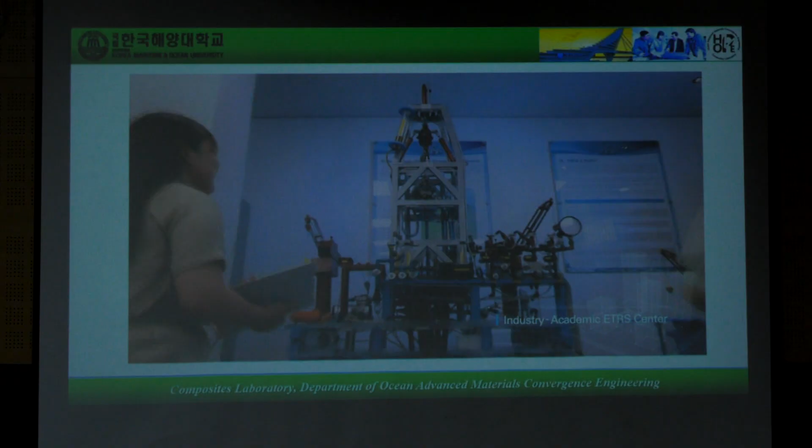The Industry-Academic ETRS Center, where various new technologies and advanced teaching methods are employed, and other town facilities are used to conduct maritime education and research. Moreover, students can freely take part in discussions and learning in a cafe-type learning area.

Thanks to the effort and training of maritime personnel, the Korea Maritime and Ocean University leads maritime education, research, policy, and culture in the Republic of Korea, developing into a maritime specialized, comprehensive university recognized the world over.

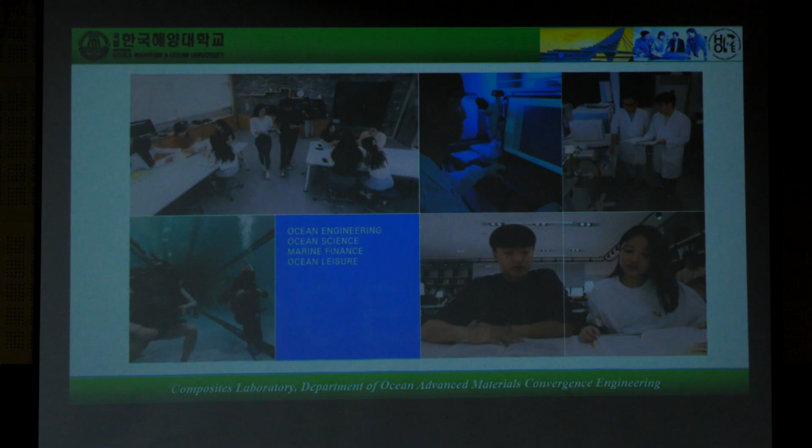Beyond the sea, the Korea Maritime and Ocean University encompasses a bigger world. The school manages specialized education and research for all fields, including the traditional maritime fields of ocean transport, shipbuilding, ports, and distribution, but also the fields of ocean engineering, ocean science, marine finance, and ocean leisure.

Further, in step with the fourth industrial revolution, the school is leading the future maritime industry with autonomous navigation, smart ships, and maritime future cities. This is a comprehensive university with global maritime specialization of the highest international standards. This is the Korea Maritime and Ocean University.

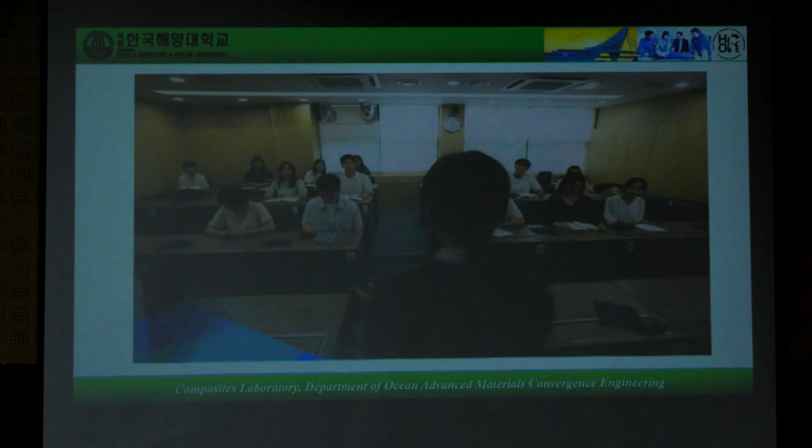Maritime personnel are cultivated at 3 colleges: the College of Maritime Sciences, the College of Ocean Science and Engineering, and the College of Humanities and Social Sciences, and at 5 graduate schools: the Graduate School of General Studies, the Ocean Science and Technology School, the Graduate School of Maritime Industries, the Graduate School of Maritime Finance, and the Graduate School of Global Logistics.

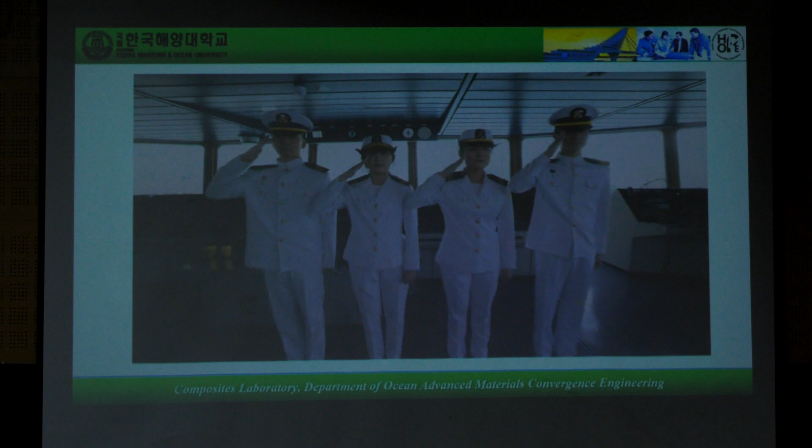A vast sea. We are not afraid to venture out beyond Korea into the world. The Korea Maritime and Ocean University will be the compass and our dependable companion on the voyage of our life.

Our university was established firstly as a national university in Korea. Actually, it was established in 1945.

From now, I'd like to introduce our composite lab. Here, me, and I have 2 postdocs from India. Right now, Sanjay Kumar, he is very smart and has really good ability to publish many papers. And I also have doctoral candidates from China, Kenya, Pakistan, and Korea.

I am also collaborating with several institutes in Korea. They are all my ex-students. So let's enjoy.

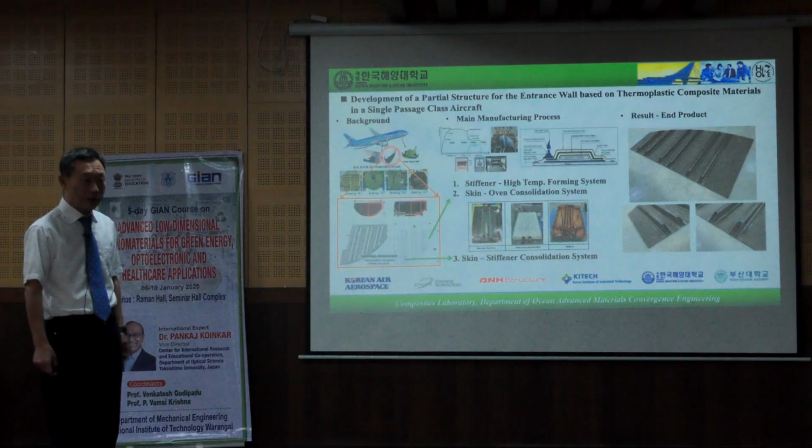As you know, our composite material is widely used in aircraft, automotive, and the ocean industry including shipbuilding. So it's very important nowadays, especially in aircraft, where composite material is used more than 50%.

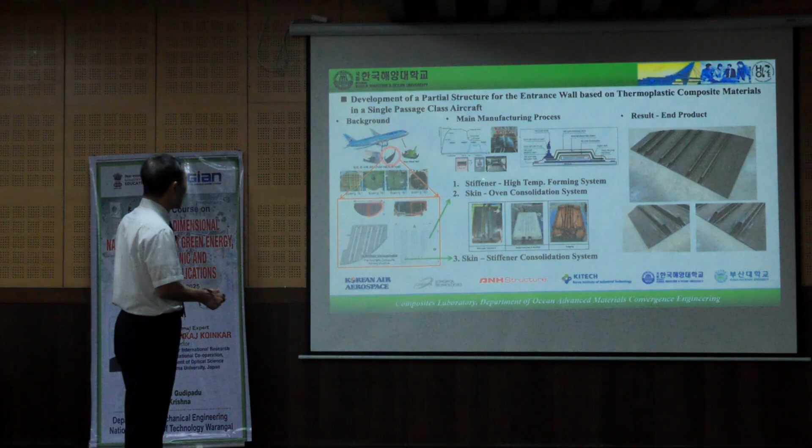So our final target will be like this. Every day we evaluate and apply a stiffener and skin by using the oven consolidation system, like this, and the skin-stiffener consolidation system.

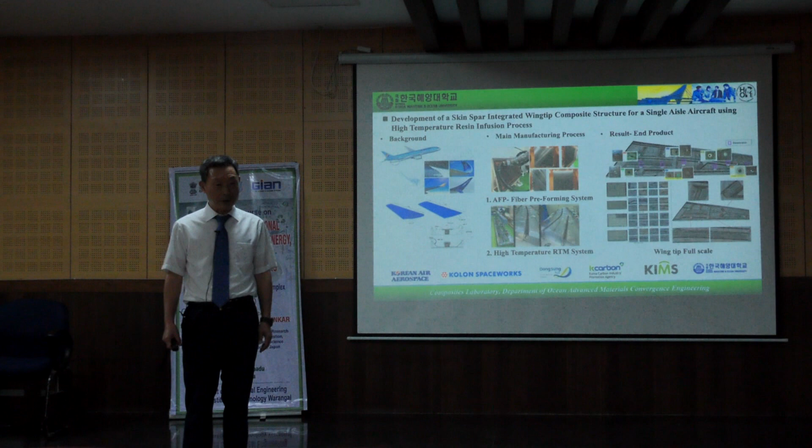And the second one, the development of a skin-spar integrated wingtip. This project was done over 5 years, so all those results are from 5 years of research. Here's our background, and the manufacturing process is like this. We are using AFP and the high-temperature RTM process, resin transfer molding system. Our final end product will be like this, the wingtip, full scale.

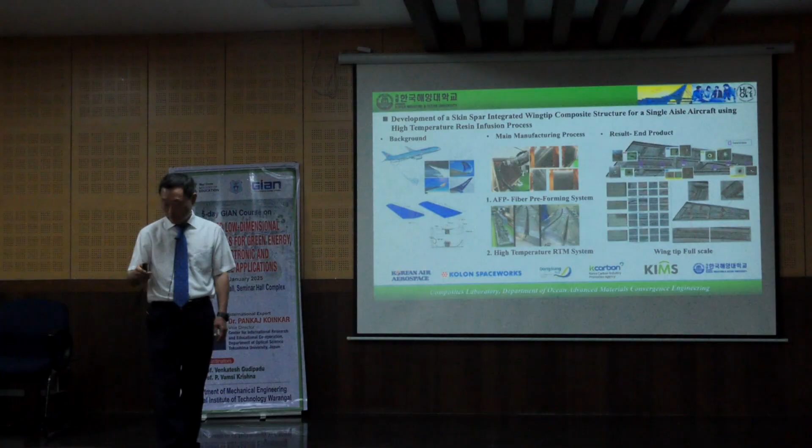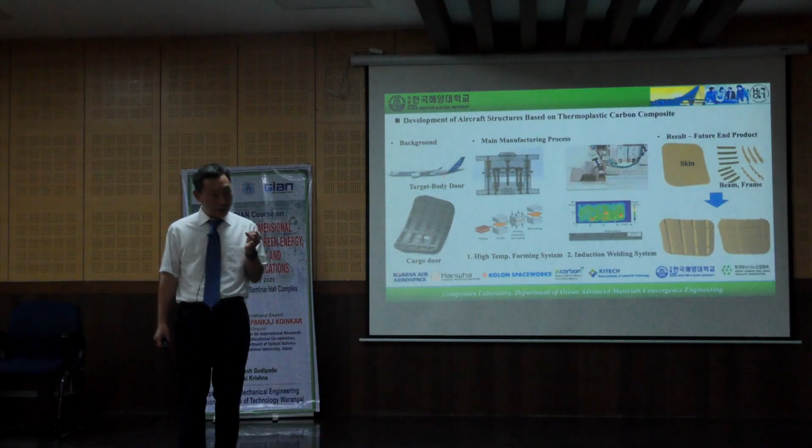Another one is aircraft structure based on thermoplastic carbon composite. As you can see, my project is closely related to mechanical engineering, material science, and nanomaterials. You can see all those fields.

Our background is like this. We are now trying to develop this kind of cargo door, and our end product will be like this. The procedure will be like this.

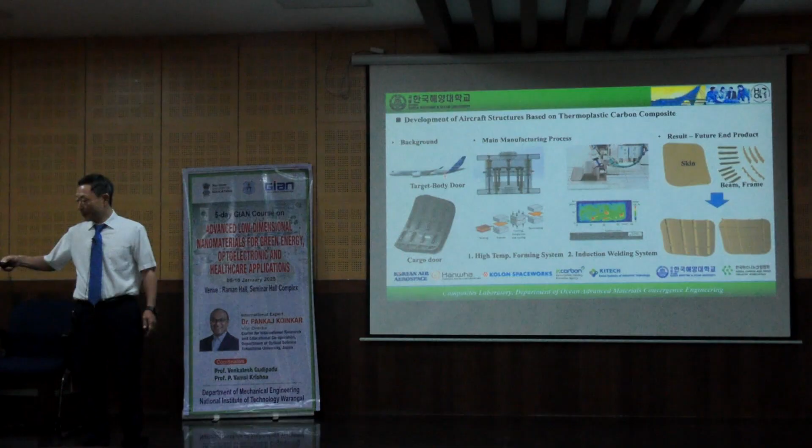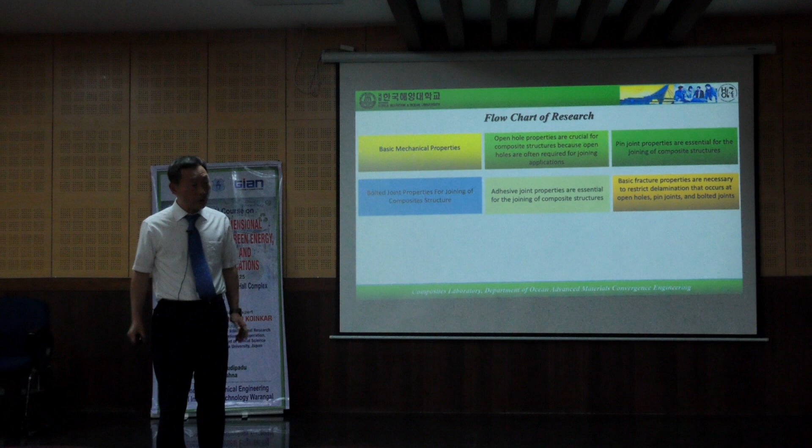And adhesive joint properties are essential for the joining of a composite structure. As you may know, composite material has a very serious problem due to delamination. So here, basic fracture properties are necessary to restrict the delamination that occurs at open hole joints, pin joints, and bolted joints.

Also, we have to apply this kind of composite structure to industry, like aerospace, automotive, and shipping. So industrial purpose composite structure is very important to develop.

So I'd like to present the first topic: combined effect of temperature and pre-bending on the flexural properties of carbon fiber polyetherketoneketone composites. So from now, let's enjoy. Okay, so that is here.

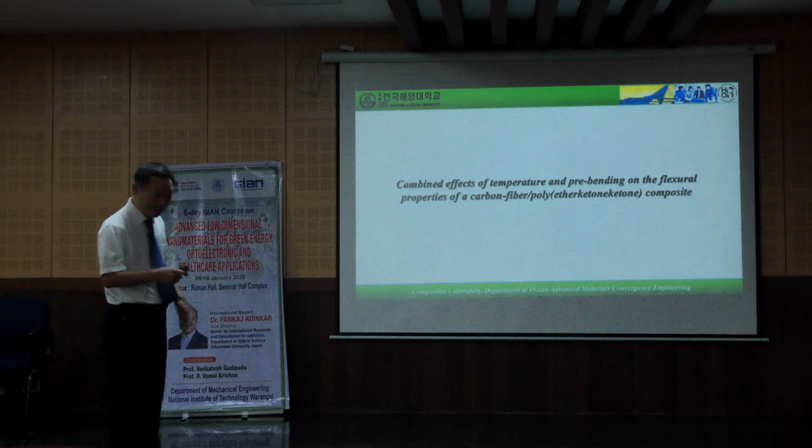As you can see, fiber reinforced thermoplastic polymer (FRTP) is widely used in aircraft, and also UAM structures, and automotive. We are now targeting to apply it in this structure. So the classification of plastics is like this.

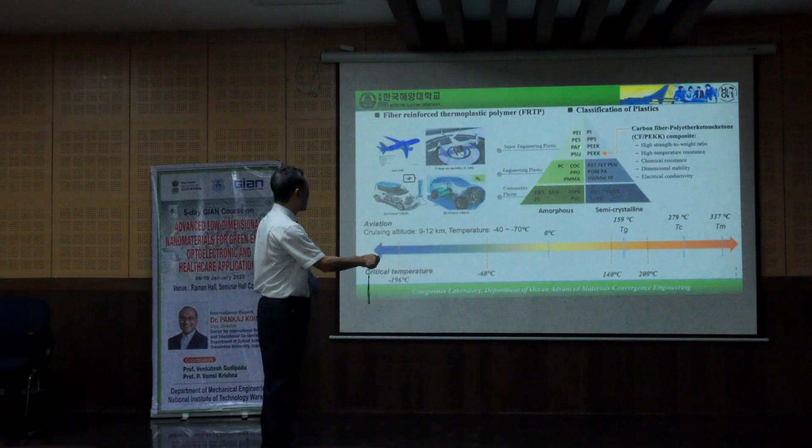Amorphous structure as a super engineering plastic, and engineering plastics is like this. And also, as a semi-crystalline here, I'm now using this kind of PEKK, CF/PEKK. So just to remind this.

In aviation, the cruising altitude will be 9 to 12 kilometers, right? And the temperature is minus 40 to minus 70. So our temperature range will be minus 196 Celsius as a crucial, critical temperature, and also minus 60.

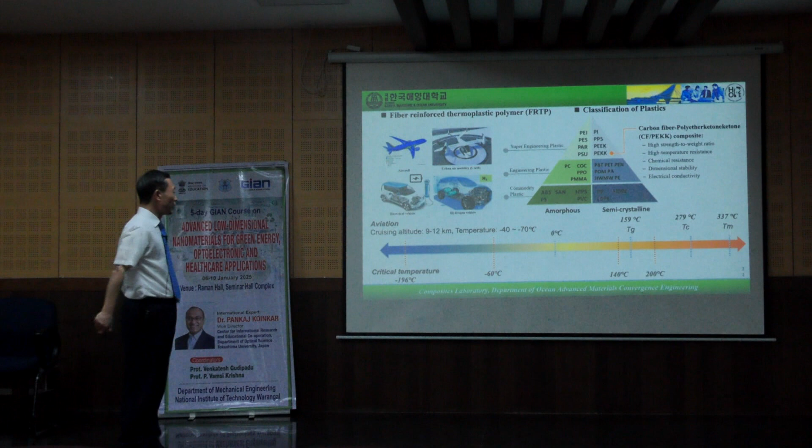Our CF/PEKK has a glass transition temperature of 159. 159. So we decided on temperatures of 140 and 200. This is our temperature range for the experiment.

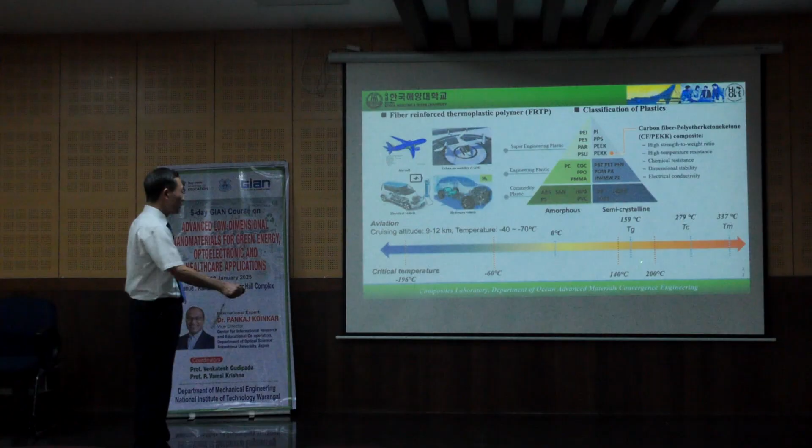We prepare the specimens like this. The CF/PEKK composites are fabricated with 12 layers of prepreg and consolidated under vacuum, achieving a thickness of 1.7 millimeters and an exceptionally low void content.

We have to lay up the procedure like this. We stack the prepreg, 12 stacked layers of CF/PEKK, and by using the vacuum bag and the oven consolidation, after that we prepare the final composite plate.

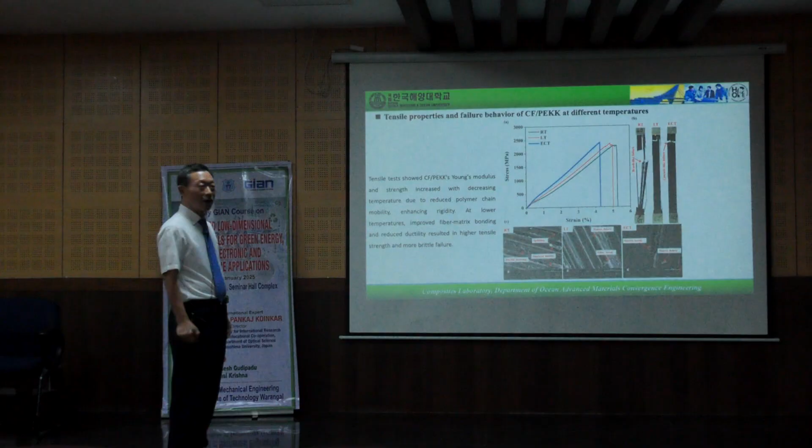This slide means tensile tests show the CF/PEKK's Young's modulus and strength increased with decreasing temperature, due to reduced polymer chain mobility enhancing rigidity. At lower temperatures, improved fiber-matrix bonding and reduced ductility resulted in higher tensile strength and more brittle fracture.

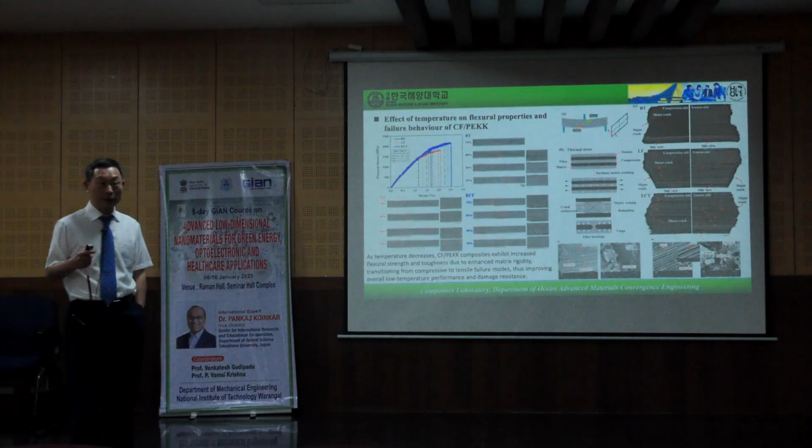This kind of result was published in Composites Part A. The impact factor is more than 7, a very good journal.

This slide shows the flexural stress and strain relationship, and as you can see, as the temperature decreases, at extreme cryogenic temperature, CF/PEKK composite exhibits increased flexural strength and increased toughness due to enhanced matrix rigidity.

Transitioning from compressive to tensile failure mode, thus improving overall low temperature performance and damage resistance.

Just look at this mechanism. Thermal stress will occur like this: in the case of fiber, under compression, and matrix under tension. This kind of residual stress will occur here, and the fracture mode will be changed.

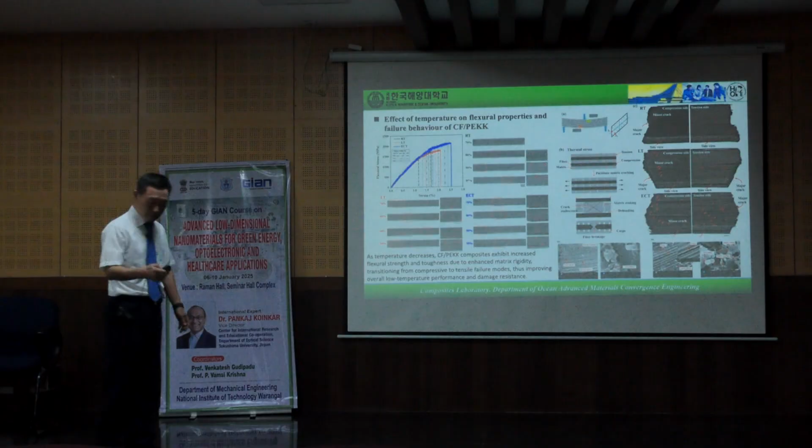Also, the effect of temperature on flexural behavior of pre-bent CF/PEKK. You can compare in case of 30% pre-strain. The fracture morphology is like this. Just look at the procedure.

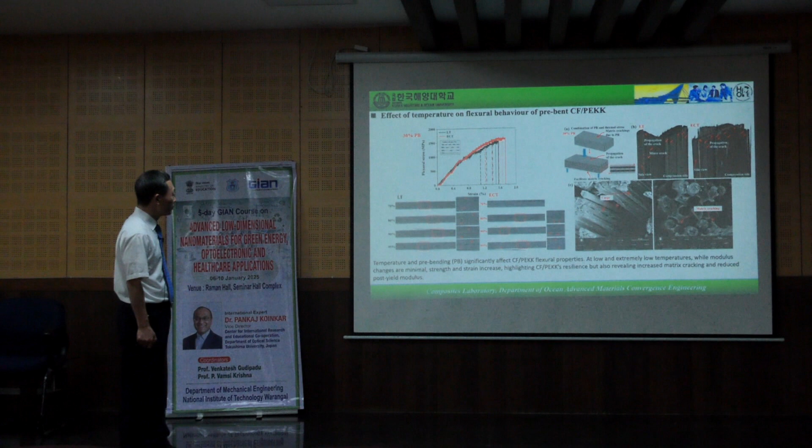Can you follow me? Yeah. Let's go slowly.

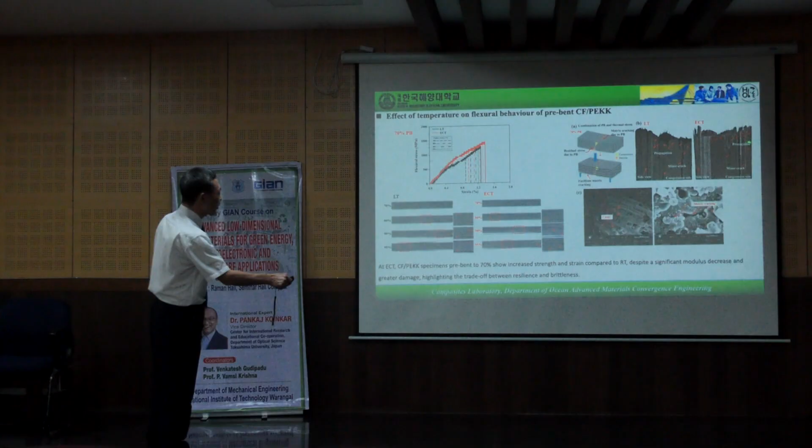And this slide shows the effect of temperature on the flexural behavior of pre-bent CF/PEKK. In case of 70%, big difference. Low temperature, extreme cryogenic temperature: micro-cracks will occur like this. So you can compare between 30% and 70%.

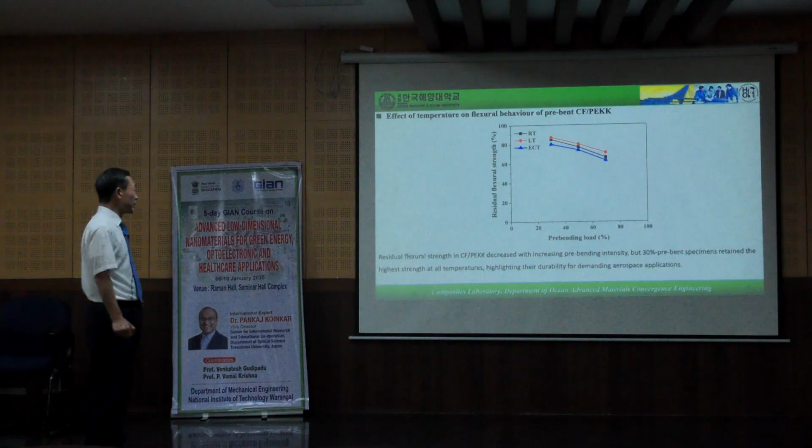This slide shows the residual flexural strength at room temperature, extreme cryogenic temperature, and low temperature. Residual flexural strength in CF/PEKK decreased with increasing pre-bending intensity, but 30% pre-bent specimens retain the highest strength at all temperatures. Here, 30%. Highlighting their durability for demanding aerospace applications.

This is a very important result. So under 30% pre-bending, we can use it. This is a very important result. So our consortium is using this data.

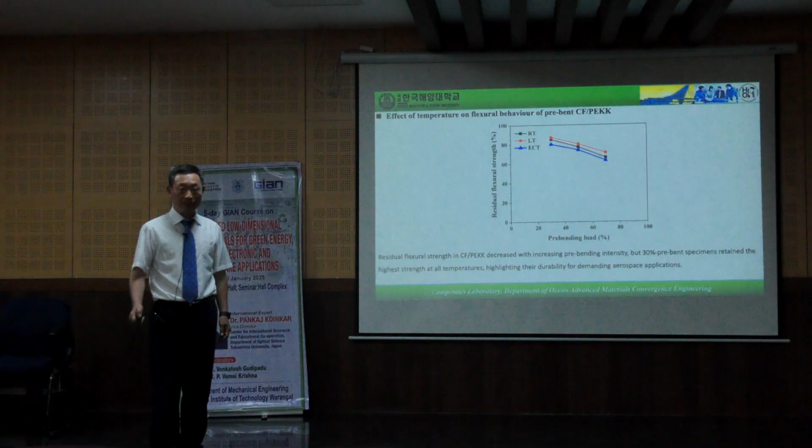I'd like to move to the second issue: tensile behavior of open hole, pinned joint and bolted joint of CF/PEKK composite under extreme temperature. Mechanical joints offer several advantages, like easy installation, repair, resistance to environmental factors, and higher safety factor, a reliable and preferred joining method in modern composite structures.

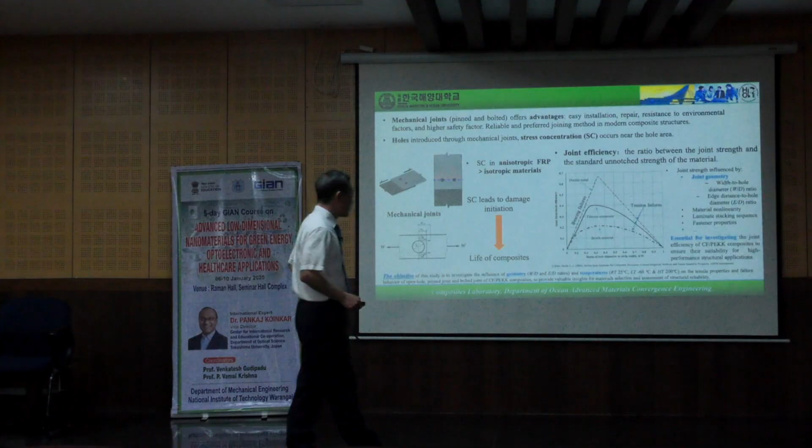But when we create a hole, stress concentration will occur like this. It will reduce the life of the composite. So you can see this kind of shade. So at this point, it is very important to check the joint efficiency. The joint efficiency here. Joint strength is influenced by joint geometry.

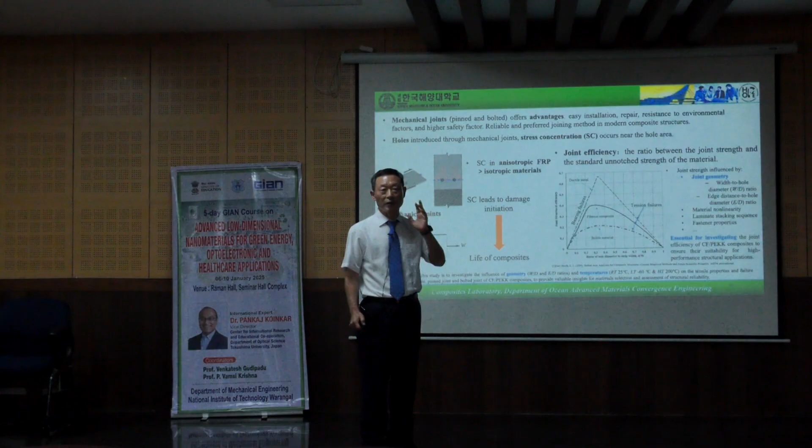Width to hole diameter, the W/D ratio, is very important here as a parameter. And edge distance to hole diameter, the E/D ratio, is very important. So in this paper, the very important factors are W/D and E/D ratio. So systematic research will be performed.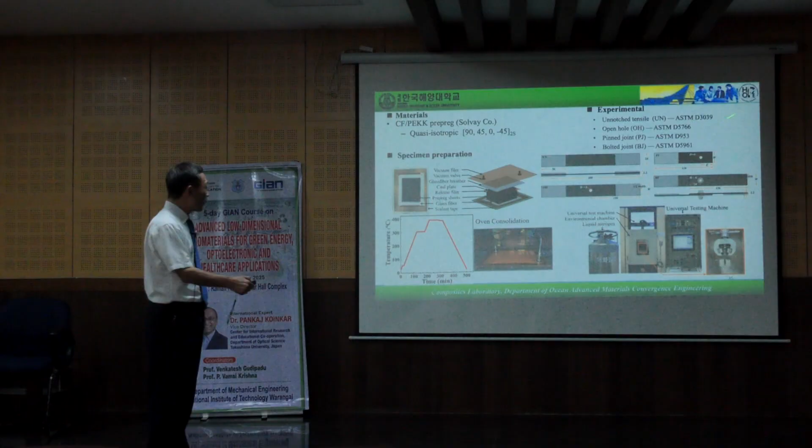We prepared 4 kinds of specimens like this: unnotched specimen, open hole, pinned joint, and bolted joint. Here we are coping with some limitations, because this is a very, very expensive material. 1 roll, the price will be $10,000. Very expensive material. So it is not easy to handle this material. We have to be careful to handle and prepare this kind of specimen.

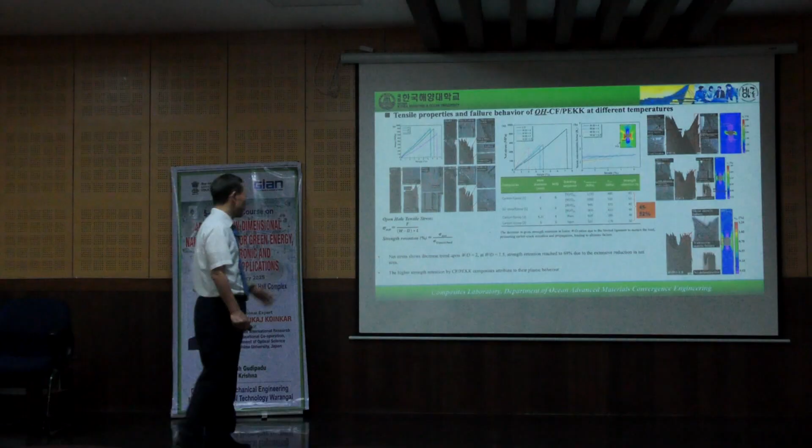First result, tensile properties and failure behavior of open hole CF/PEKK at different temperatures. Please look at this data. This is from the reference values: composites, carbon epoxy, glass epoxy, and carbon epoxy. Just look at the strength retention value, around 45 to 52%. But in our CF/PEKK composite the strength retention reached 69%. This means this is a very good, high quality material. So we are using this material.

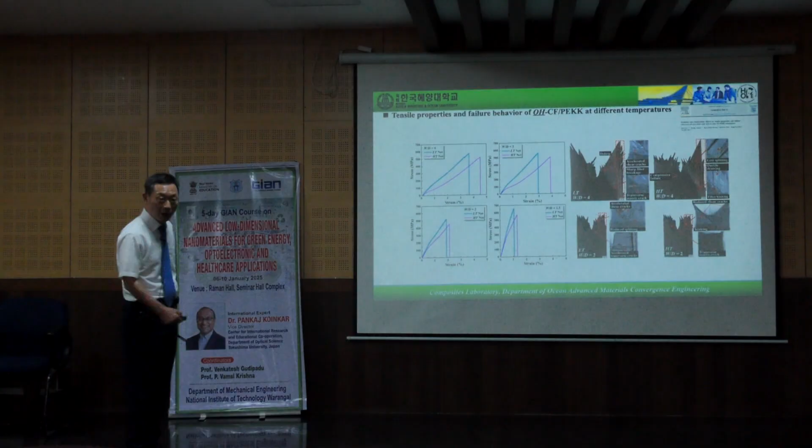This slide shows the tensile properties and the failure behavior at different temperatures. We also published this in the Composites Part A journal. We changed the W/D ratio from 1.5 to 4. So just compare those behaviors. In case of 1.5, the behavior is like this, small strain, and 2, 3, 4, at low temperature and high temperature. The fracture morphology will change like this.

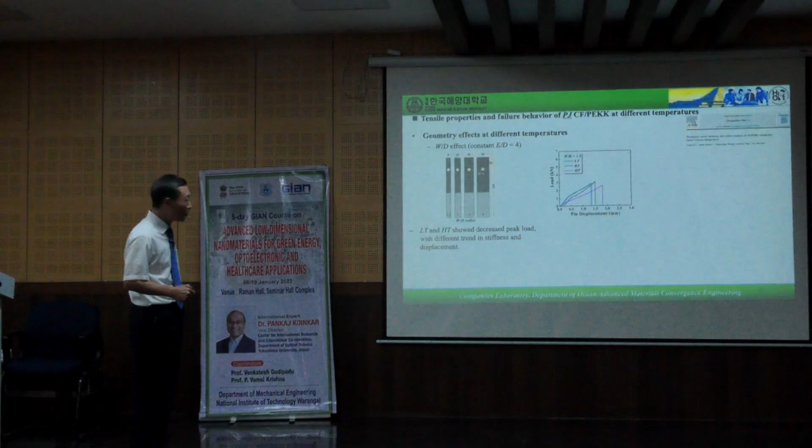The failure behavior of pinned joint at different temperatures, W/D effect under constant E/D ratio equal 4. Just compare the result. We prepared this kind of specimen. The result is like this. In case of W/D equal 1.5, low temperature, room temperature, high temperature.

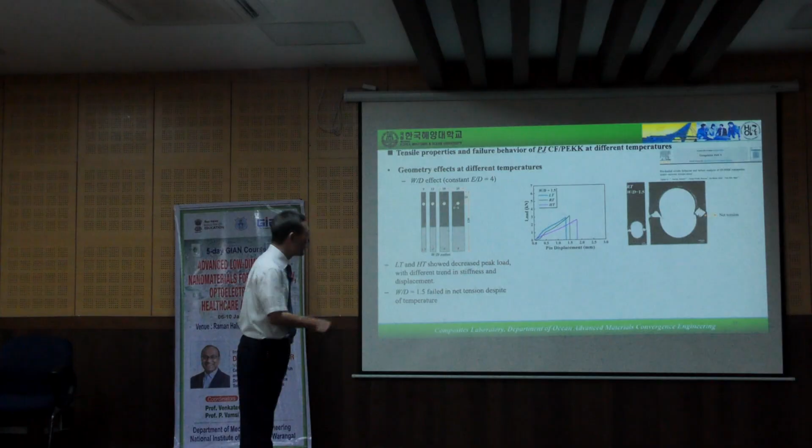Low temperature and high temperature showed decreased peak load with different trend in stiffness and displacement, right? Just look at the fracture behavior. In case of 1.5, totally occurred net tension hold.

In case of 2, can you see the bearing failure mode? Not the net tension. Called bearing failure. This is the result, 3 and 4. Whole bearing failure. Bearing. W/D 3 and 4.

So, finally, we summarize like this. W/D effect under constant E/D ratio equal 4. Marginal load increased due to the same bearing failure. Increased specimen width prevented net tension failure mode. Bearing failure achieved beyond W/D ratio 1.5. Very important result.

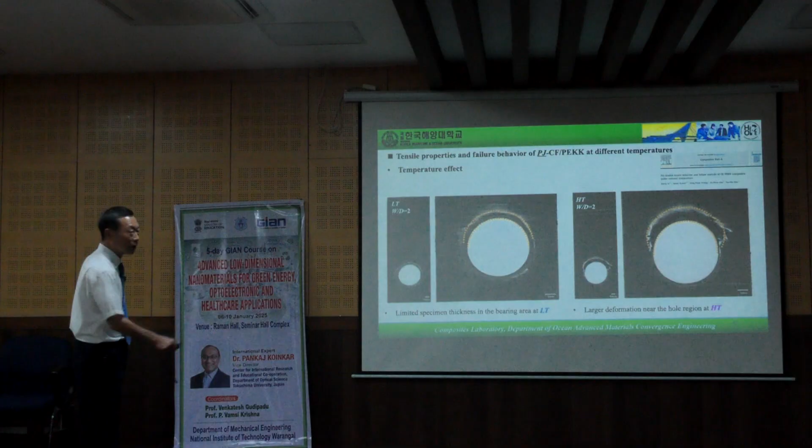Just compare low temperature, high temperature, same W/D ratio. The fracture will be occurred like this as a bearing mode. And pin joint CF/PEKK at different temperature, the fracture behavior, geometry effect at different temperature, E/D ratio effect. Just before we compared the W/D ratio. This is E/D ratio under W/D ratio, the constant ratio.

Just we'd like to compare the bearing strength. The relation between bearing strength and the W/D ratio shows right there. Bearing strength primarily influenced by W/D ratio, right? And E/D ratio had minimal impact. Also, bearing strength at the low temperature and the high temperature slightly lower than room temperature. W/D ratio and E/D ratio equal to 4 shows the highest bearing strength. Right. This is also a very important result as a bearing strength.

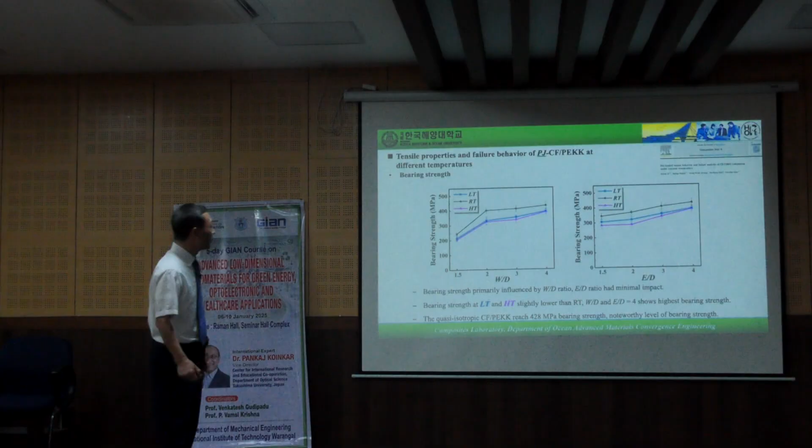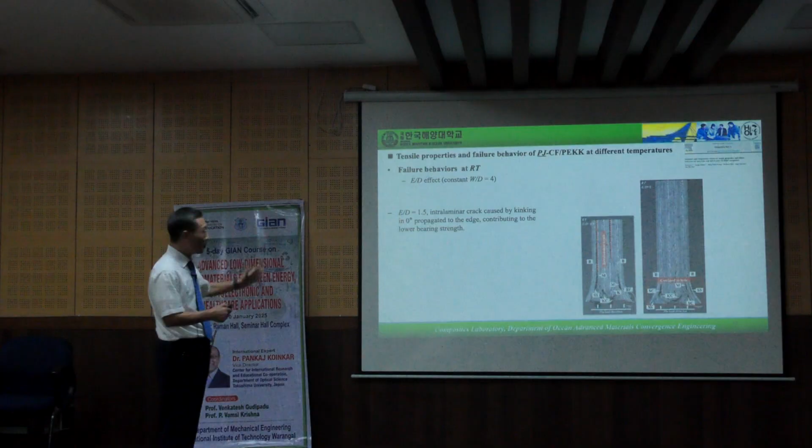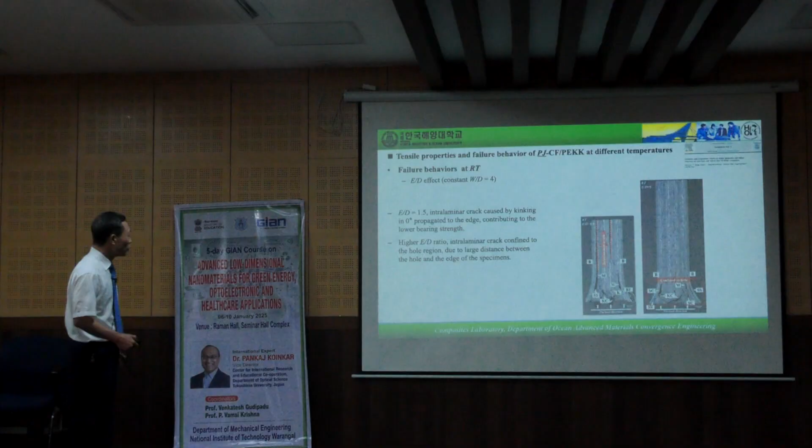So, just before we compared the W/D ratio; from now, E/D ratio under constant W/D ratio. E/D ratio equal 1.5. Intralaminar crack caused by kinking in 0-degree propagated to the edge, contributing to the lower bearing strength. And the higher E/D ratio than 1.5, intralaminar crack confined to the hole region, due to large distance between the hole and the edge of the specimen.

At the low temperature, we can observe the buckling and kinking and kink collapse, bending failure, and the shear-shaped crack, shear-driven compression. So temperature changes, the thermal deformation occur along the fiber directions. Intralaminar crack and interlaminar crack also will occur. At the low temperature, fiber under compression, matrix under tension. So the reduced thickness of specimen due to the temperature-induced acceleration of a localized compressive failure.

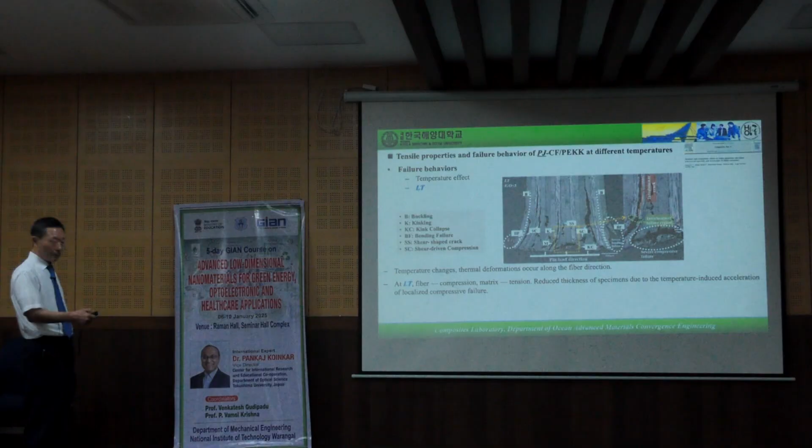At high temperature, we can observe the crack pattern like this. At high temperature, increase the ductility, right? So increased ductility of PEKK resulted in significantly large plastic deformation and external pile-up you can observe. In this case, fiber under tension, matrix under compression, right? So the severe bending failure in 90 degree due to the accelerated compressive failure of matrix.

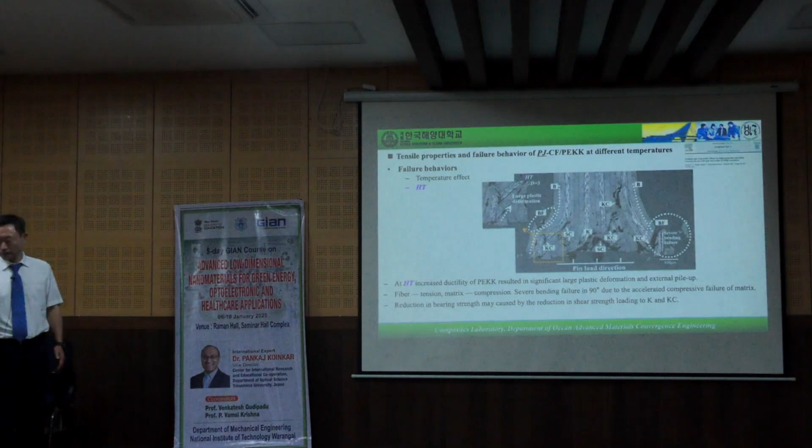We check the situation by using the DIC. In case of 1.5, geometry effect, load displacement. DIC images at the 99% failure displacement reveal minor bearing before fracture with predominant tension failure. We check the situation. In case of 1.5,

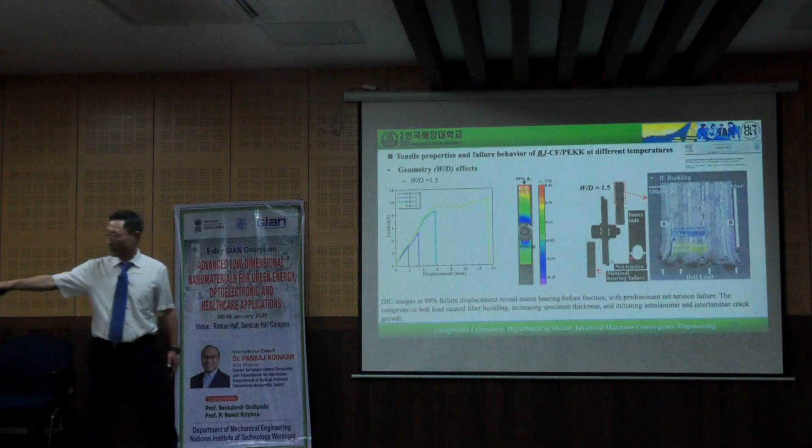in case of 2, just compare the fracture pattern. Increasing W/D to 2 yields 66% higher peak load and displacement. DIC images show increased bearing, shifting from net tension to combined net tension and bearing mode, with minor bending near the bolt contact area.

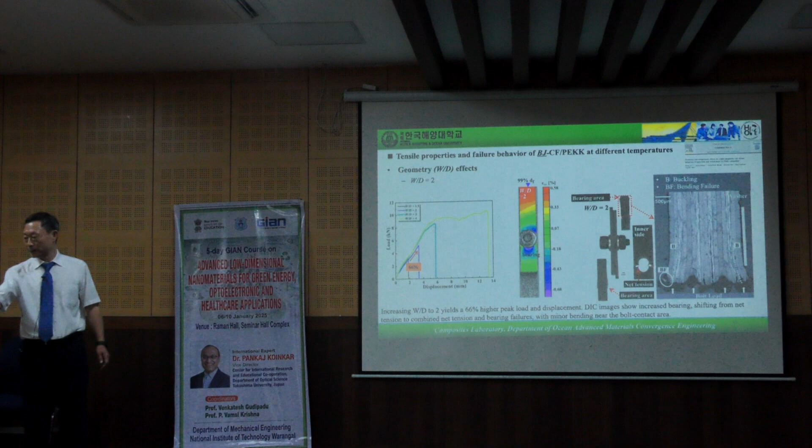This is W/D equals 3. DIC pattern like this. I will skip this, very similar with the previous slide. Just look at the fracture pattern, bearing area.

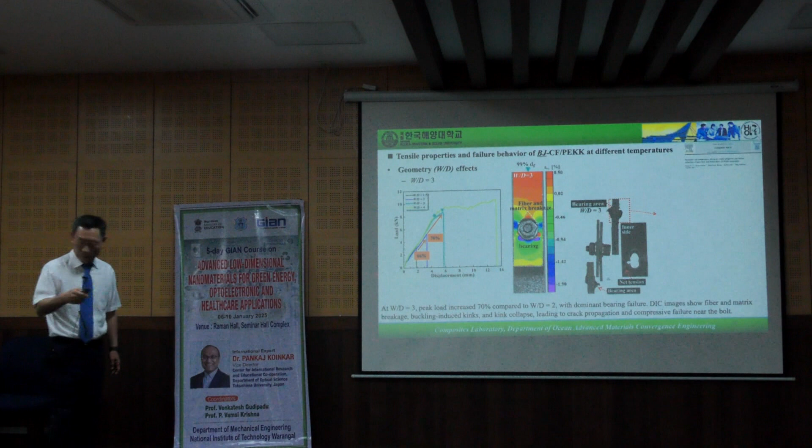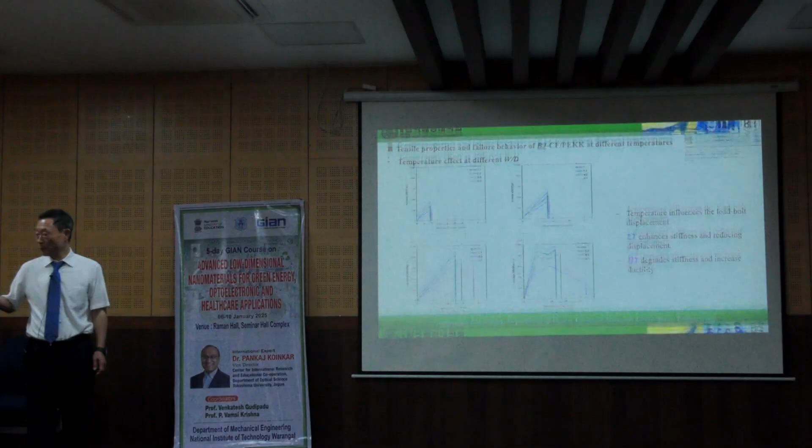Finally, we compare the joint efficiency depending on the W/D ratio. Just look at the results. Because of time limitation, I'd like to move to the next issue. Here, strengthening of a composite through incorporation of a halloysite nanotube. From now, I'd like to move to the nanomaterials effect.

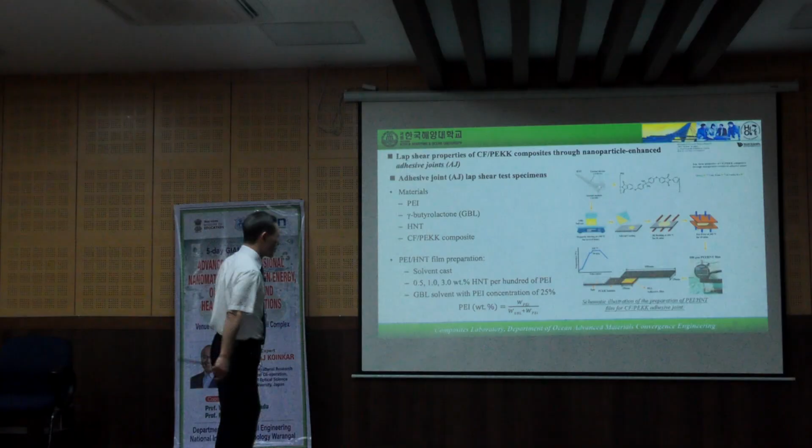This slide shows the lap shear properties of CF/PEKK composite through nanoparticle-enhanced adhesive joint. We prepared the specimen like this. Schematic illustration of the preparation of PEI/HNT, HNT means halloysite nanotube, film for CF/PEKK adhesive joint.

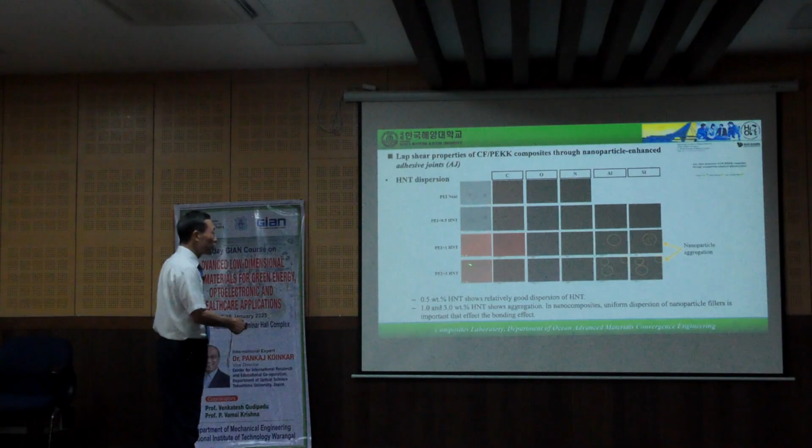We observe the HNT dispersion situation. In case of 1% HNT and 3% HNT, we can observe nanoparticle aggregation. This is a very big problem in incorporating into the composite material, because this kind of aggregation causes stress concentration. This is a big problem, so we have to solve it.

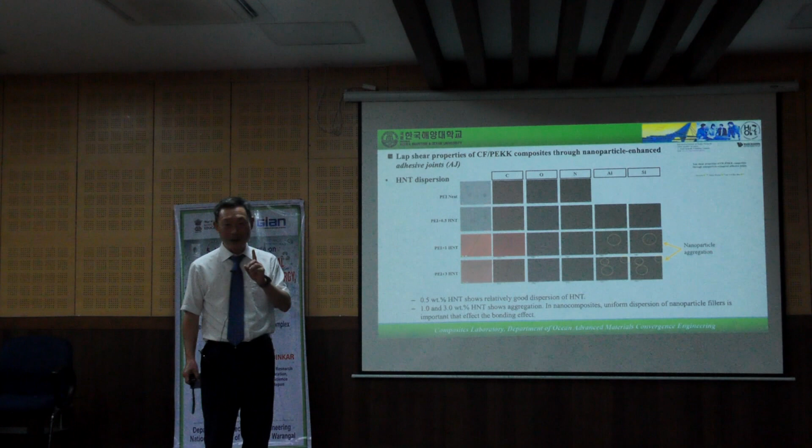So, in case of this aggregation situation, two stages of aggregation will occur. The first stage occurs by van der Waals force, and second, chemical shrinkage. So, two types will occur. So, 0.5, 1.0 and 3%. The situation is like this.

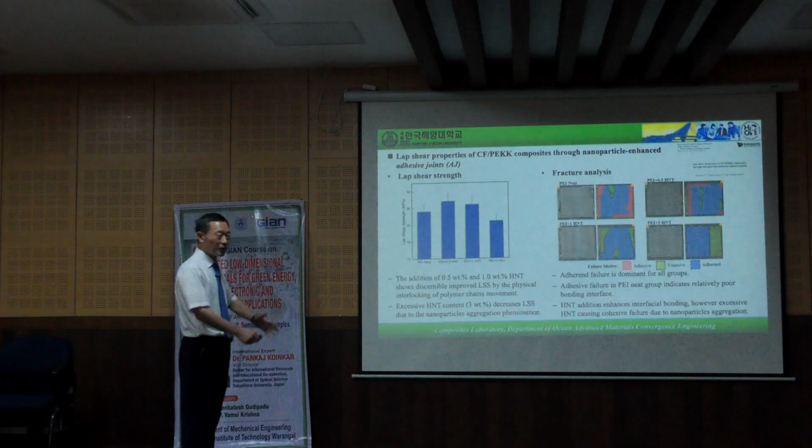Also, we performed the lap shear strength test through nanoparticle-enhanced adhesive joint. The lap shear strength for 0.5 HNT shows the highest value. This is the main result here. Over 0.5, it decreases. So we finally used this 0.5 result.

Also, we observed the fracture pattern, 0.5, 1, 3%. Detection of Si and Al indicates the bonding joint interface is formed by the complex layer of PEKK, PEI, and HNT. The situation is like this.

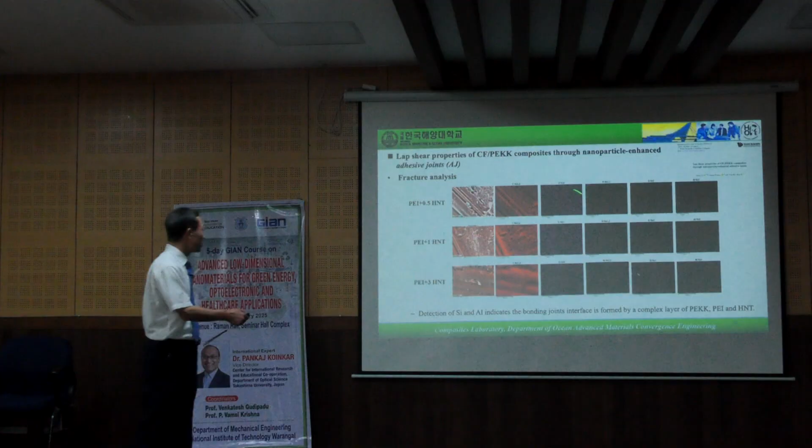Neat PEI, PEI plus 0.5 halloysite nanotube, fracture morphology. We can observe several phenomena here. In case of neat PEI, it shows smooth ductile drawing and exposed fiber and exhibits poor bonding between fiber and resin. 0.5 is the most important. So 0.5 shows rougher ductile drawing with resin residue and cusp morphology, which indicates improved interfacial bonding. In case of 1 and 3, just look at the fracture morphology and compare.

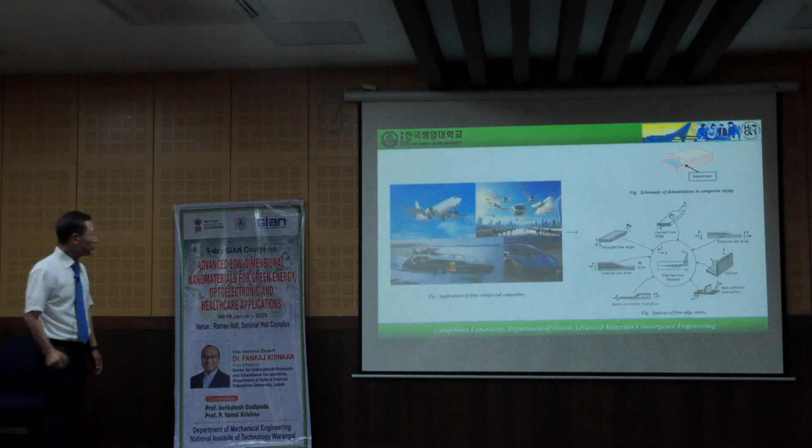So, from now I'd like to move to another issue. Effect of melt-infusion of PET, PEI, and PEEK thermoplastic film interleaves on the fracture toughness and failure behavior of carbon fiber epoxy thermosetting composite. This left-hand side shows the application of fiber reinforced composite. So, automotive and UAM and aircraft.

We prepared the specimen like this. Just before, I mentioned delamination. Delamination is a big problem, so we have to prevent this kind of delamination. We use PET, PEI, PEEK. We prepared the CFRP preform and the stacking procedures, and we use vacuum-assisted resin transfer molding. And finally, we prepared the mode 1 specimen and the mode 2 specimen.

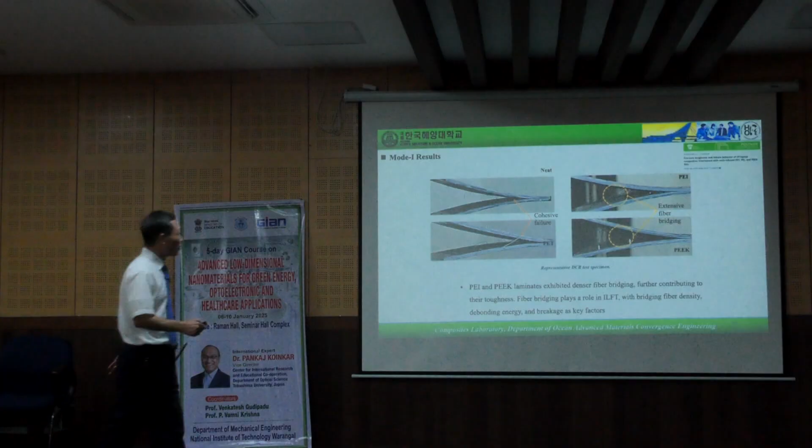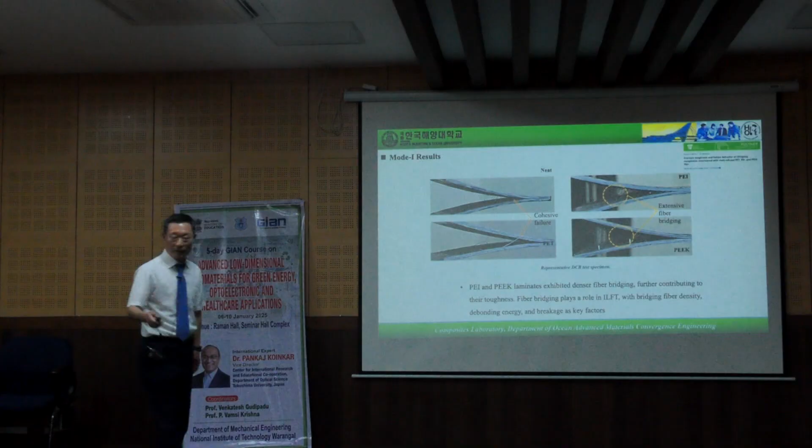This is the result of mode 1. Again, neat, PET, PEI, PEEK. The situation is like this. In case of PEI and PEEK, we can observe fiber bridging, nano bridging occurs like this. But neat and PET, we cannot. We also observe the same image. Neat, PET, PEI, PEEK.

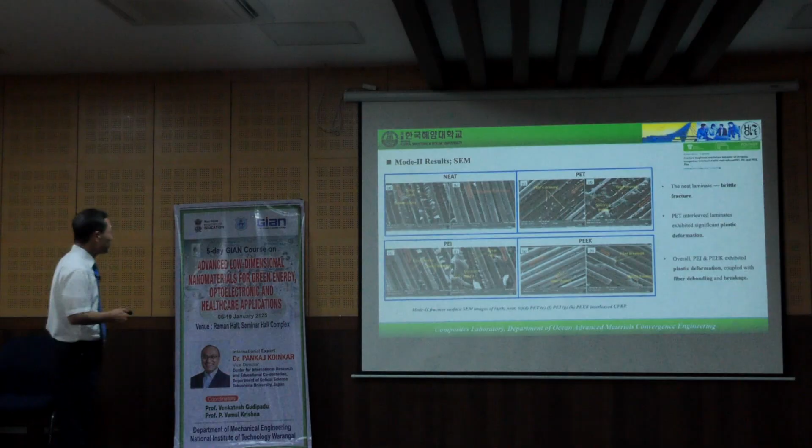Incorporating PET, PEI, and PEEK film significantly improved the mode 1 and mode 2 ILFT, interlaminar fracture toughness. And the failure modes in mode 1 were characterized by cohesive failure and predominant intermittent adhesive failure, leading to a tortuous crack path with extensive plastic deformation in PEI and PEEK interleaved laminates.

In mode 2, the neat and PEI laminates fail cohesively, while in the PEEK laminate, the crack deflected to the weaker TP-epoxy interface due to its weaker bonding with epoxy than PEI, limiting its full toughening potential. This result acknowledges the critical role of matrix compatibility.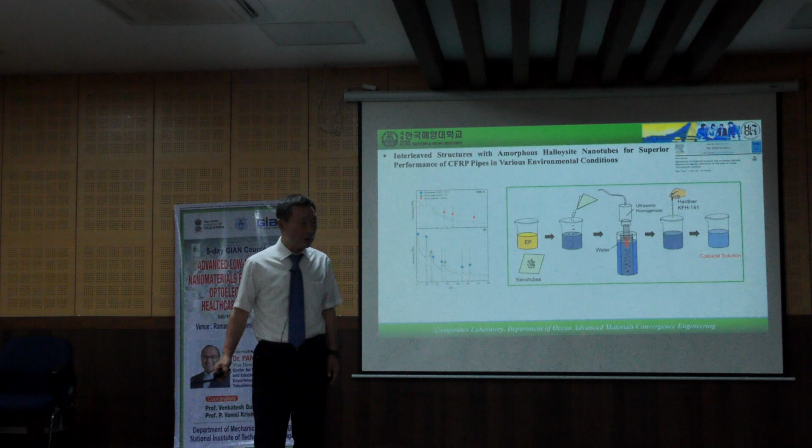So we prepare the specimen, epoxy, nanotube. We prepare the specimen. In case of a pipe composite, we prepare 5 kinds of specimen. E3 means neat epoxy. And E2A1 means 2 layers of neat epoxy and 1 amorphous layer. So we designed 5 kinds of specimen like this.

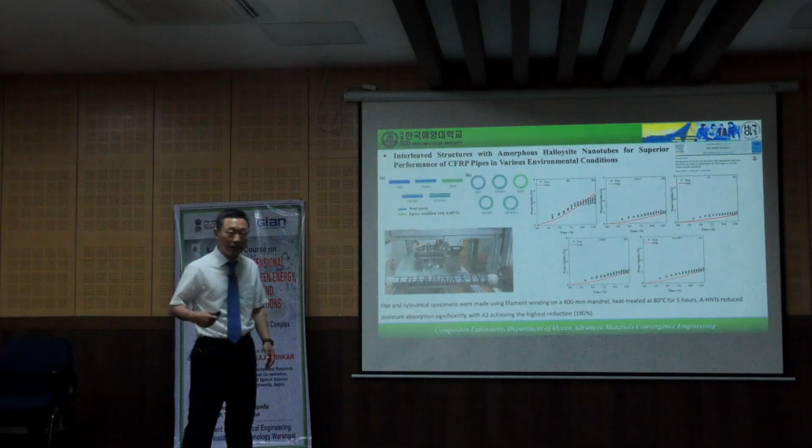The result: flat and cylindrical specimens were made using filament winding on a 400 millimeter mandrel. We call this mandrel. And filament winding. Finally, we can get the 5 composites. Here, heat treated at 80 Celsius for 5 hours. Amorphous halloysite nanotubes reduce moisture absorption significantly, with the amorphous structure achieving the highest reduction, 190.

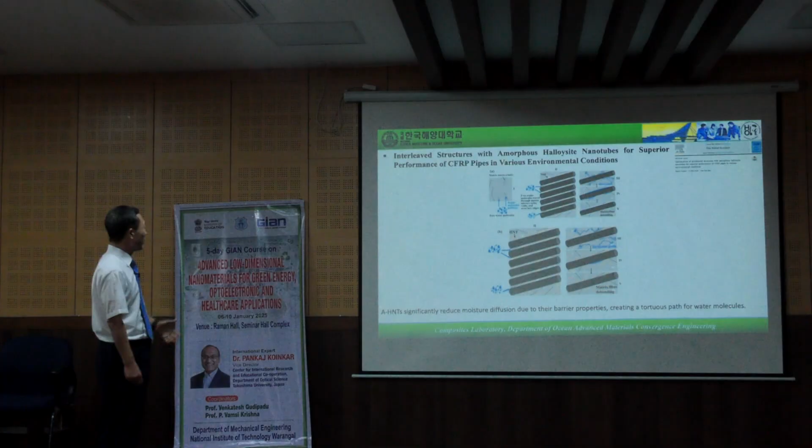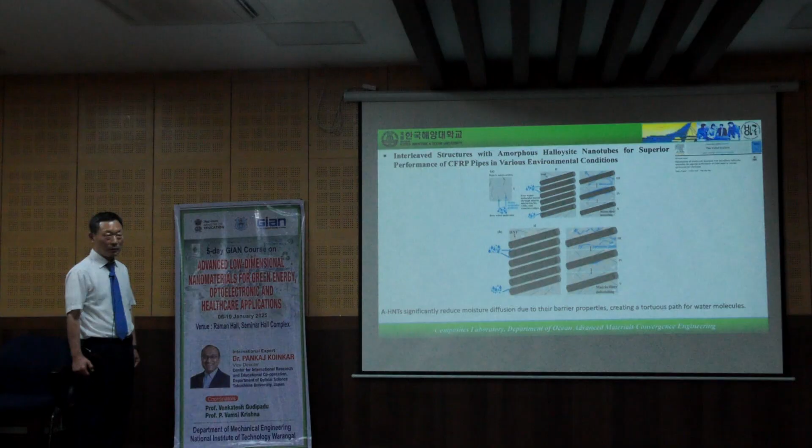Here, interleaved structure with amorphous halloysite nanotubes for superior performance of CFRP pipes in various environmental conditions. This result is also published in Thin-Walled Structures. Amorphous halloysite nanotubes significantly reduce the moisture diffusion. Very important thing: due to their barrier properties, a tortuous barrier will be made, incorporating the halloysite nanotube.

Just to compare those results, flexural stress and strength before moisture absorption, after moisture absorption, and after drying. The situation is like this. We can summarize it like this. Before moisture absorption, AHNT composites showed superior flexural modulus and strength. A3 had the highest strength, meaning the amorphous structure, 3 layers, showed the highest strength. Moisture reduced the flexural properties, but the AHNT composite retained higher performance, showing 30% reduction.

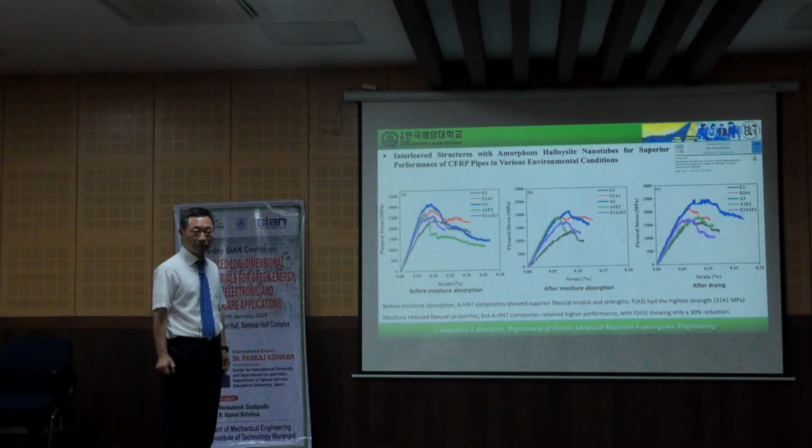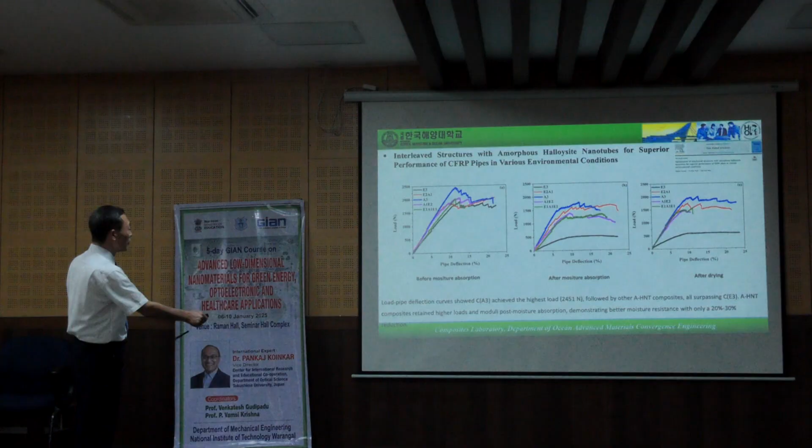Before and after drying, the situation is like this. Morphology change. Also, load and deflection. All those design structures change like this. This slide shows the relationship between stiffness before and after drying. So here, as you can see, the highest value is A3, 0.5 halloysite nanotube, and amorphous halloysite nanotube showed the highest value. We check the situation and the flex pattern.

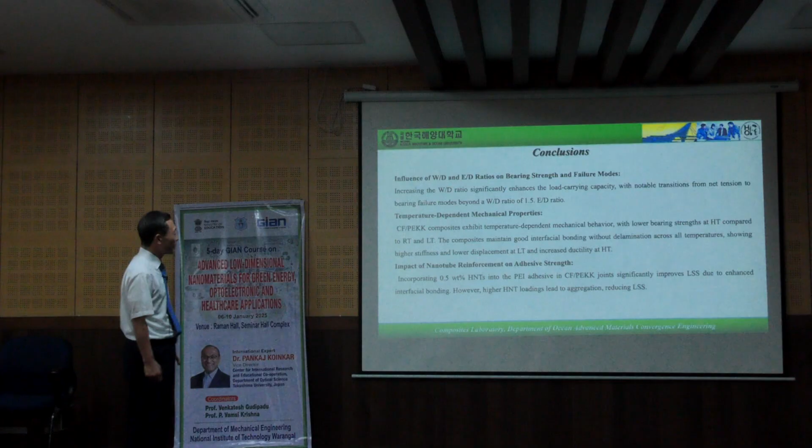Finally, I'd like to conclude all our research results. The first, influence of W/D ratio and E/D ratio on bearing strength and failure mode. Geometry effect. Increasing the W/D ratio significantly enhances the load carrying capacity, with a notable transition from net tension to bearing failure mode beyond the W/D ratio of 1.5 E/D ratio. This is a very important thing regarding geometry effect.

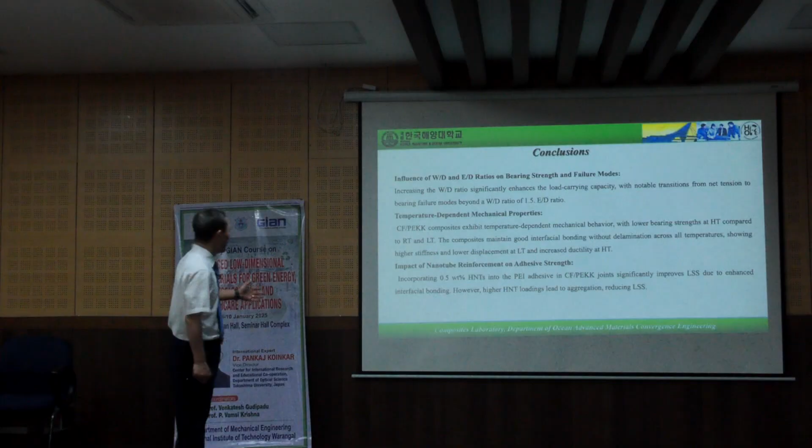And the second, temperature-dependent mechanical properties. CF/PEKK composites exhibit temperature-dependent mechanical behavior with lower bearing strength at high temperature compared to room temperature and low temperature. The composites maintain good interfacial bonding without delamination across all temperatures, showing higher stiffness and lower displacement at low temperature and increased ductility at high temperature. This is the second result.

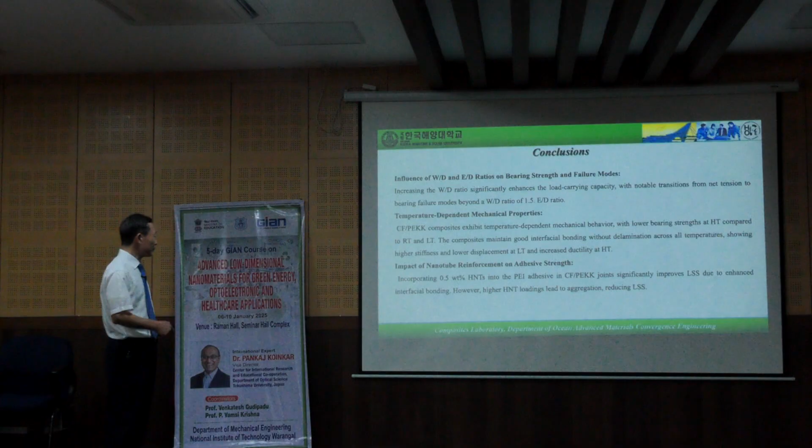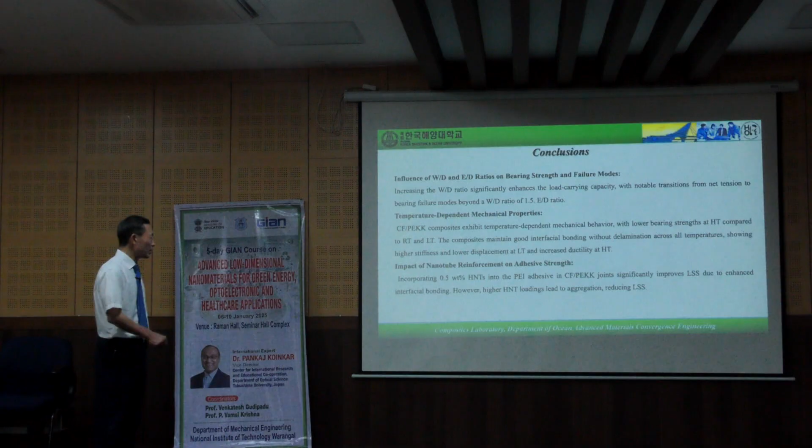And the third, impact of nanotube reinforcement on adhesive strength. Incorporating just 0.5 wt% HNTs into the PEI adhesive in CF/PEKK joints significantly improved lap shear strength due to the enhanced interfacial bonding. However, higher HNT loadings lead to aggregation, reducing lap shear strength.

Regarding the effect of melt infusion polymers, melt infusion of PET, PEI, and PEEK films into carbon fiber composites significantly enhances the fracture toughness and damage tolerance, with improvement of up to 284% in mode 1 and 188% in mode 2 interlaminar fracture toughness, establishing it as an effective toughening technique.

The fifth one is moisture absorption and mechanical performance. Carbon fiber composites modified with amorphous halloysite nanotube exhibit reduced moisture absorption and higher flexural and pipe stiffness, both before and after moisture exposure. The A3 and E2A1 structures particularly demonstrate superior mechanical performance and stiffness post moisture absorption, making them promising for industrial application.

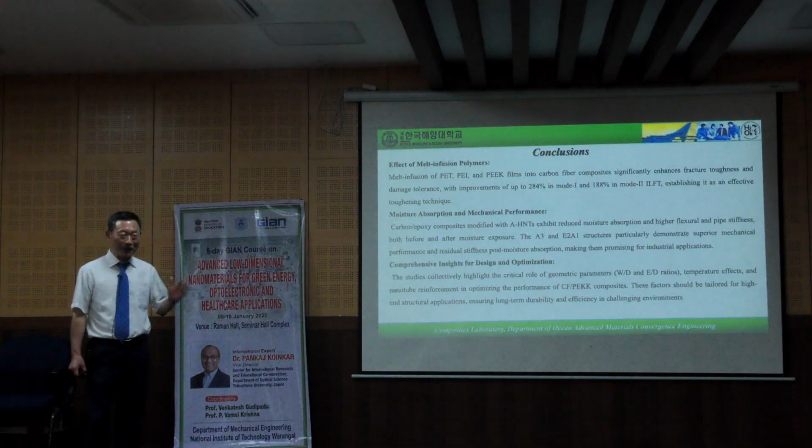This is the final one. Comprehensive insights from our experimental research for design and optimization. The studies collectively highlight the critical role of geometric parameters, W/D ratio and E/D ratio, temperature effect, and nanotube reinforcement in optimizing the performance of CF/PEKK composites. These factors should be tailored for high-end structural application, ensuring long-term durability and efficiency in challenging environments.

So this is our systematic research. So I concluded finally the comprehensive insight. So thank you very much for your kind attention.